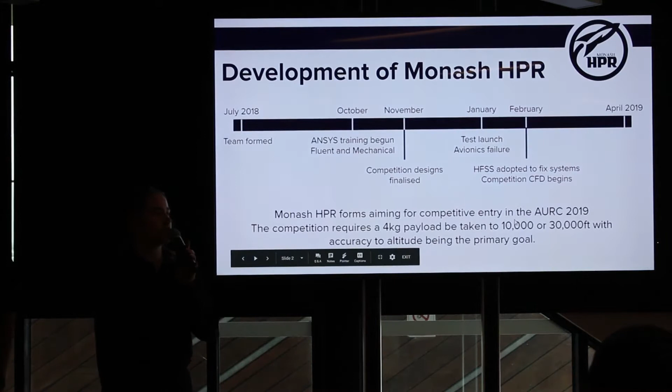I'm just going to give a little bit of background as to who we are. So HPR is a very, very new student team. We began about 9 months ago with the aim of entering the Australian University Rocketry Competition, which was the first Australian national competition ever to be run.

This presented a lot of unique challenges, which LEAP assisted us with greatly, in that we started in a position where we had to go through large certification processes. We had to launch a large number of rockets before we even got to anything competition standard. This meant that we had to do analysis on a lot of things that we weren't familiar with, and we also had to learn all of our ANSYS techniques and apply them in about a month or 2 month time span. So that was very interesting for us.

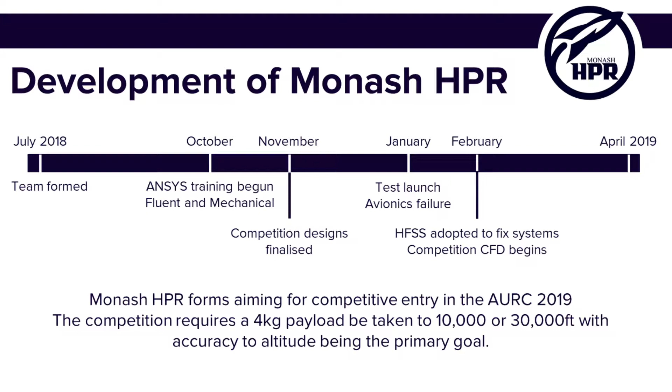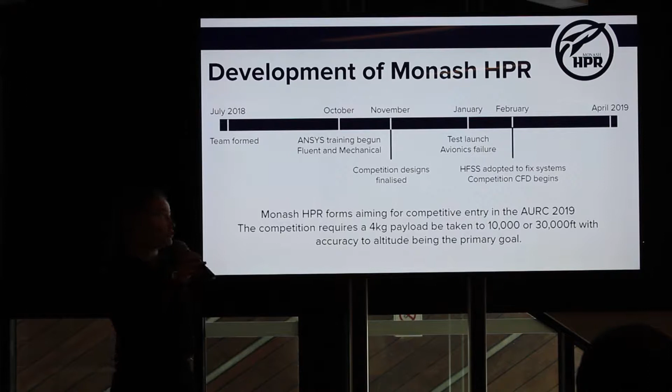We began in October with ANSYS Fluent and Mechanical, and we were able to apply some of those learnings to our design phase. And later on in January, after our first major avionics failure from a large-scale test, we actually also adopted the use of HFSS.

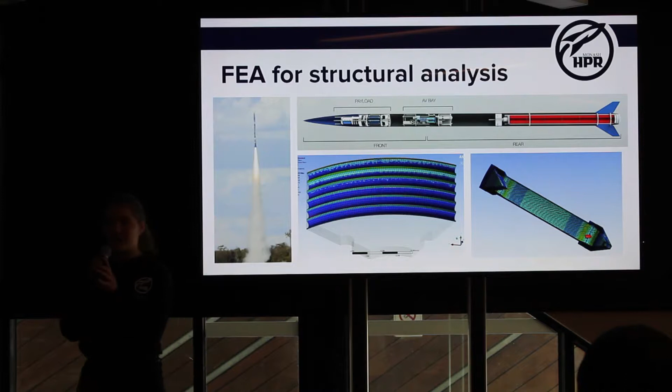So given that our rocket experiences about 8 kilonewtons of thrust loading during its launch and also goes up to about 25 Gs of acceleration, we had a lot of very unique and very difficult loading conditions that we had to deal with. In the early stages, we were able to use ANSYS to simulate epoxy adhesion on our bulkheads, as well as to analyse the bulkheads themselves and the payload chamber. So these were designed with ANSYS verifying that they were structurally sound.

Later on, as we got further into our design process and learnt how to use composite FEA, we were able to use that to analyse the structural integrity of our composite tubes. This was incredibly important as we were able to identify that they were not sufficient for flight and were able to reinforce them, so when we went to competition we didn't end up with any structural failures, which was a fantastic result.

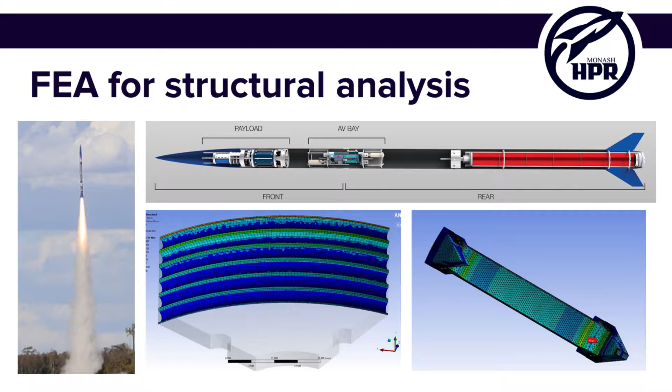CFD was used not just for design, but actually for trajectory simulation. The scope of our competition is that we are supposed to be as accurate to an altitude as possible, and given that we have no active systems on board, we were relying on making sure that our simulations were as accurate as possible. So a team set about building a custom 6 degree of freedom simulator, which we named Saturn,

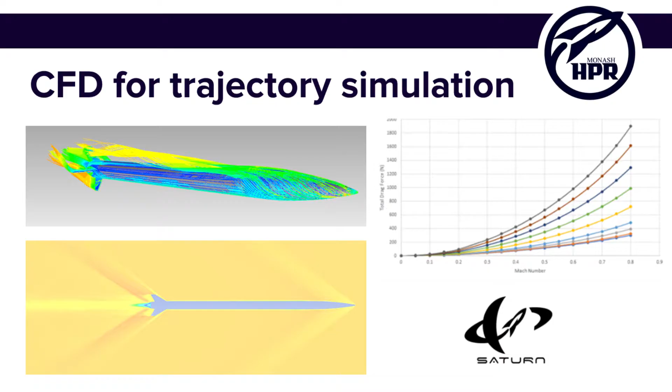and this simulator required all kinds of aerodynamic forces and moments that were applied on the rocket across a wide range of flight. So the team had to discretize the flights of our rockets into about 450 different conditions, varying pitch and roll and speeds across both subsonic, transonic and supersonic speeds. This was incredibly valuable as we actually ended up developing a simulator that was able to analyse our rocket to within 0.1% of simulated altitude, so it was a fantastic result for us, and we hope to use this simulator moving forward also to help us with our active controls.

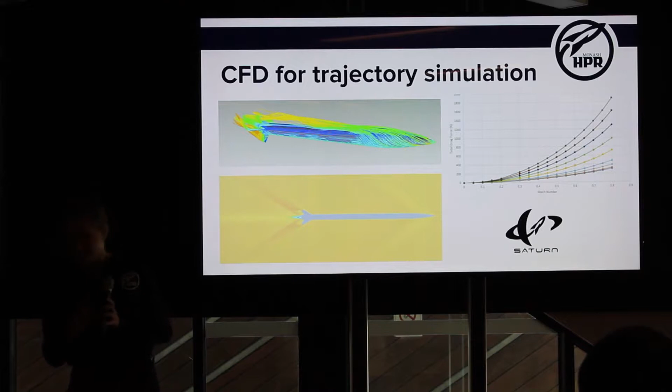Later on, when we identified that we were actually having major interference problems in our avionics bay, we turned to LEAP in a bit of a stressful situation, asking them to assist us with our shielding. So we realised that there were different things that we could do to help with our shielding from our basic understanding of RF. However, we went to them with a few solutions and identified that some of the ones we believed would be successful actually worsened our problems. So in working with them, we were able to identify what we could do to make sure we were not having any problems with our altimeters.

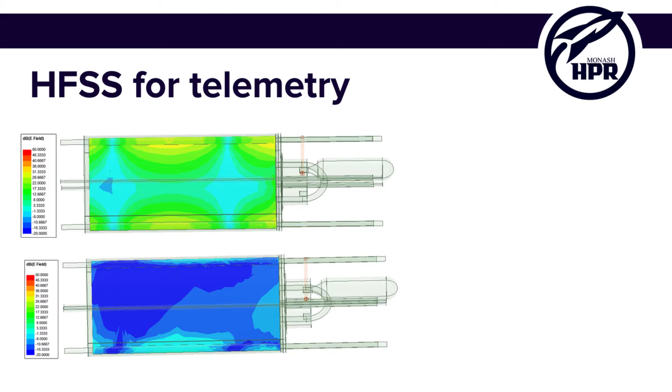And the figures you see on the screen are basically our avionics configuration with mild changes in the shielding. And you can see we had a very large change in our gain. I think the number I got given was the field interference strength was reduced by a factor of 100, which is a huge change for us. And this was incredibly, incredibly successful as we actually maintained all of our telemetry all the way up to 30,000 feet. So we got packets all the way up from our RF, which was fantastic.

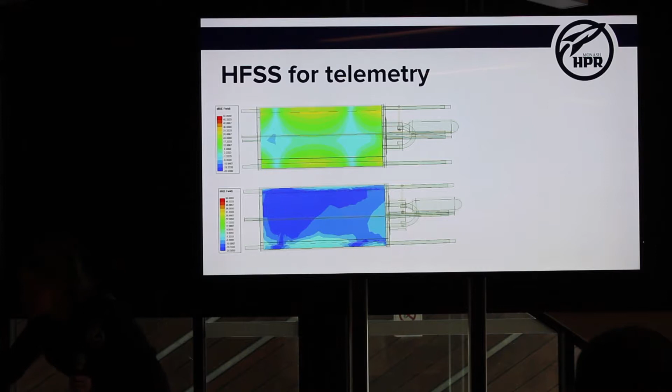So for us, major competition outcomes were that we had no structural failures, which was highly unanticipated. We were experiencing flight loading from the most powerful motor you can really get in Australia. We had a successful simulated altitude and we had no interference issues with our avionics bay.

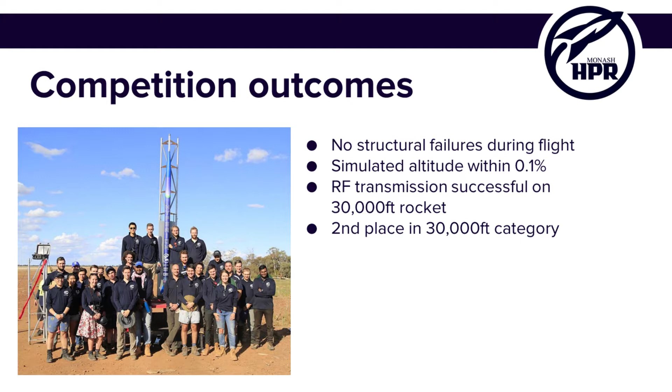So we owe a lot of our results to the incredible simulation work that the team was able to do in what was an insanely short amount of time. So massive thank you to David and the team at LEAP.

So, like this? Yep. Thank you, Megan.

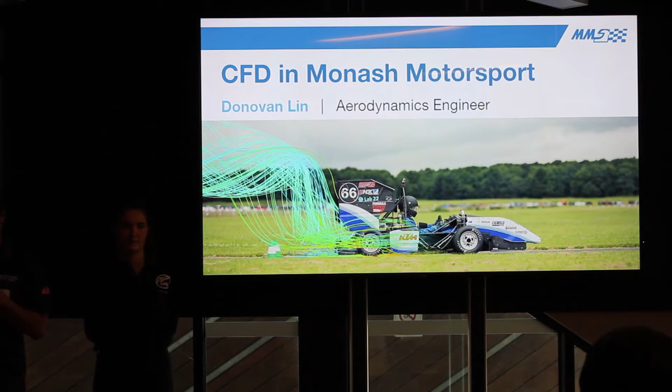So I'm Donovan. I'll be speaking for Monash Motorsport. I'm an aerodynamics engineer, and I'll be talking briefly about what we do, who we are, and how we work together with LEAP to achieve our goals. So briefly, we are a student-run team that design, build, test, and race our very own Formula race cars globally. And we employ students from all different faculties, from design, law, engineering, science, commerce. And we all work together in the technical side, business side, and the management aspects of the team.

And the Formula SAE competition we take part in is the largest student engineering competition with around 630 teams across 45 countries across the year in 11 competitions. So just a brief history of the cars. As you can see, it started out in 2000 with a very simple design. And as we moved on to more aerodynamic packages, they started out really simple with 2D element shapes. And 2013 was when LEAP Australia started working together with us, and that's when the aerodynamic packages started taking the next leap forward with more 3D elements.

And after 4 years of working with LEAP, in 2017, we felt confident enough in our aerodynamic packages to actually make 2 cars simultaneously in the same year. One of them is combustion, the other one's fully electric. And that brought us to last year, 2018, with a full 3D element system of the packages running 2 cars.

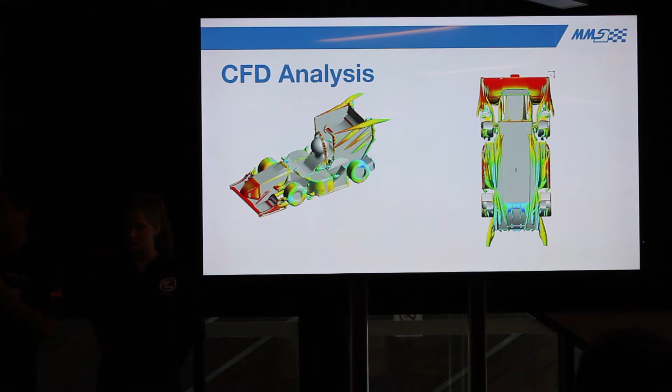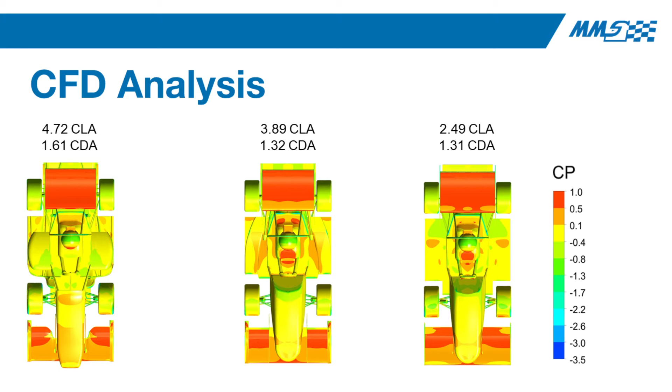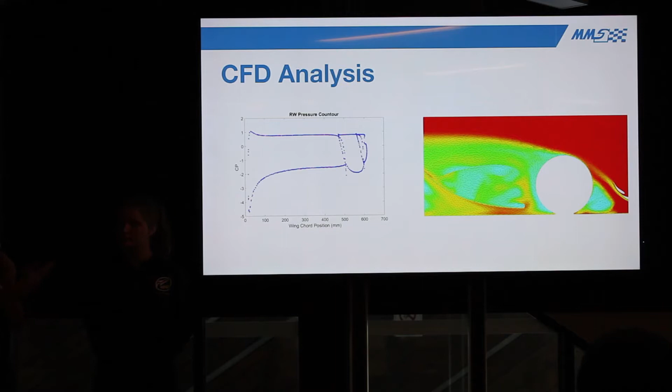So briefly, the more technical aspects of what we do at Monash Motorsport. We do CFD analysis to design the aerodynamic packages. As you can see here, this is just a vorticity to see where the airflow is going around the car to manage it. Within the design itself, we go through multiple aerodynamic packages, so you can see the iterations as we go through our designs. And we have a standardized reporting system for all of our design reports, which includes the pressure contours and the vectors and the pressure sweeps across the rear wing.

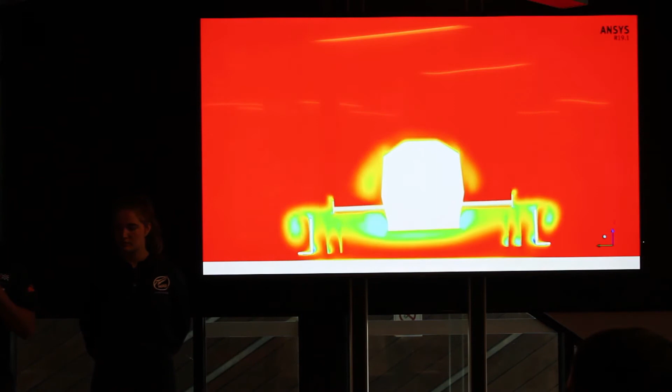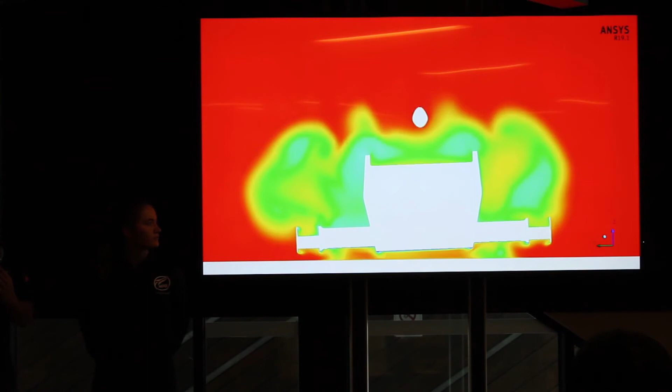So just really quickly, a short video of what we do. Oh no. There we go. So this is just the total pressure sweep in the x-axis from the front of the car to the rear. This is a standard video that's output for every single one of our runs, scripted with the help from LEAP.

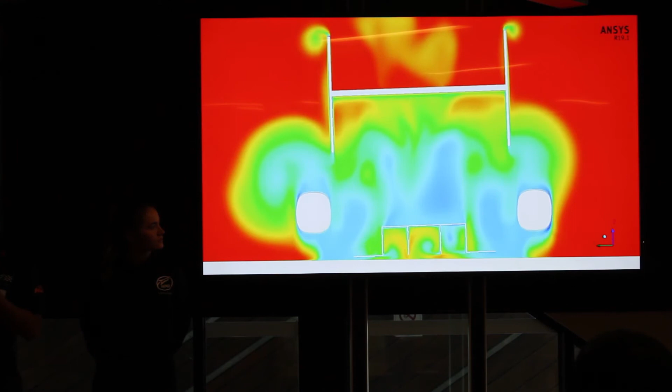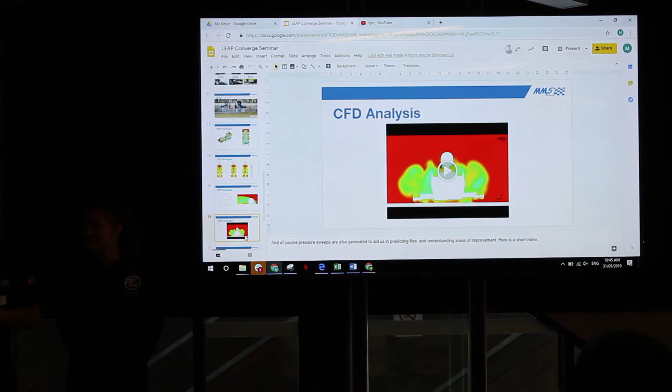There we go. No, that's fine. I'll just continue from here. Let's try this now. Yep. So in 2018, what's this? Yeah, I'm going to give up.

That's fine. So as I scrape the surface of what we do at Monash Motorsport, one of the most important things to remember is that we are a student-run team, which means every year we take a new intake of around 60 to 80 new recruits. And every year, seniors graduate, and with them, they take away the experience and knowledge that they've gained on the team. So the most important thing for the team and our biggest focus is knowledge transfer. And that is where LEAP comes in the most, because it supports us with training and teaching us the required skills we need to ensure that we perform at a higher level.

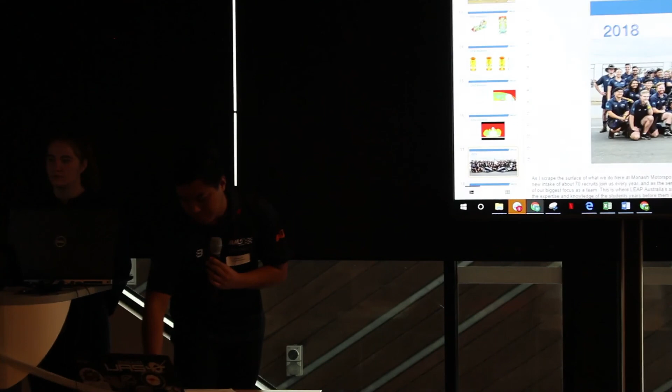And because of the support from LEAP, last year we managed to get 2nd in the world for the combustion car and 7th for the electric.